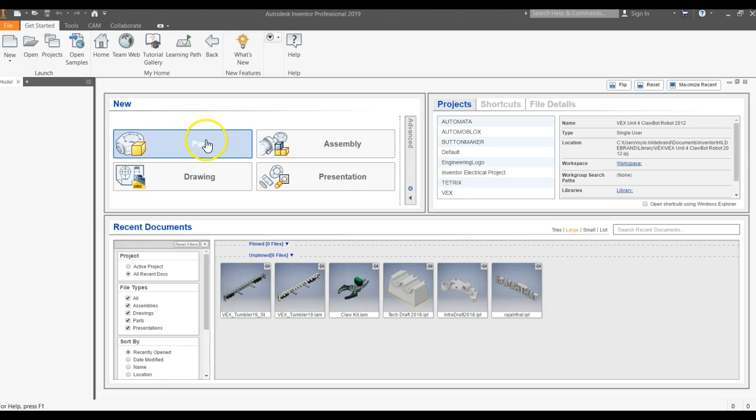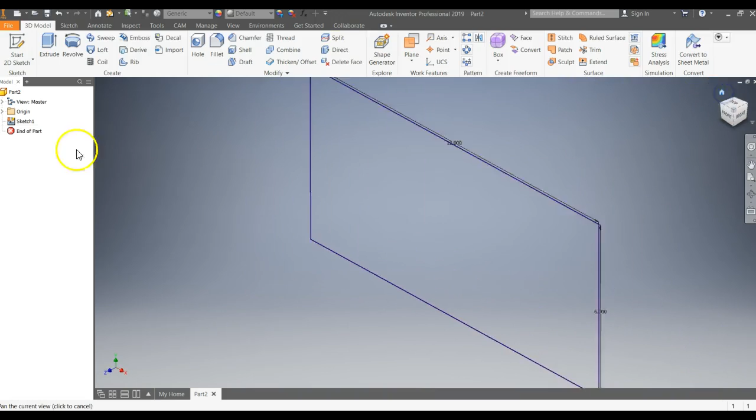So all I'm going to do right now is make a sign. Doesn't have to be any specific size really, but I'm going to make a 12 by 6 rectangle that is just shy of 3/4 of an inch. So I'm going to go rectangle tool and extend it out by 12 inches and 6 inches. So I've got a nice big piece of wood. I'm going to extrude that thing to make it a little shy of 3/4 of an inch, so I'm going to turn that into 0.7.

Great, so that's going to be our finished sign that we're aiming for. But I want to carve something out to make it look cool. So we're going to make a separate place for us to put whatever text we're wanting to cut out as a sign. I'm going to start another 2D sketch on this front face.

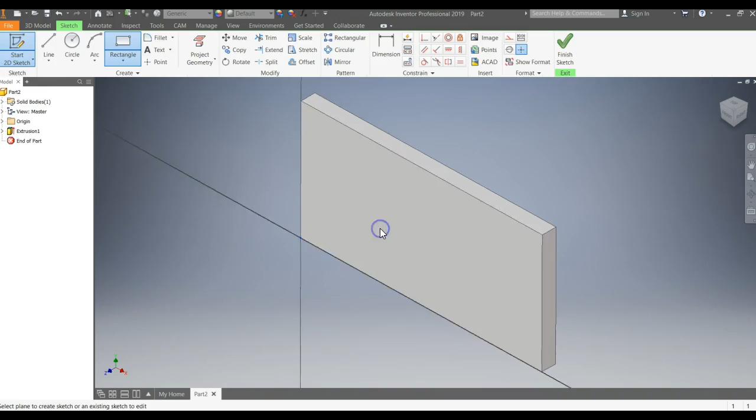I'm going to put another rectangle right there, and let's dimension this thing just to give it some proper symmetry. So if I dimension this, let's see, 3/4 of an inch seems fine. I'm going to create a gap all the way around the outside edge, that's 0.75, 3/4 of an inch.

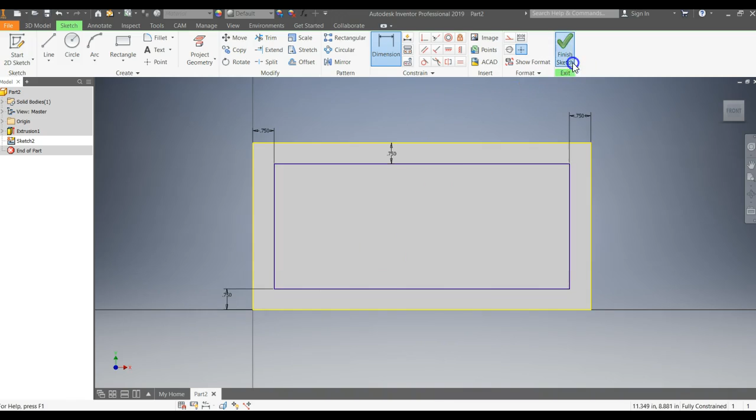All right, that rectangle, we're going to extrude that into the piece of wood. Make sure you select, so you can bring it out just to see what you're doing, but then turn it around. We're going to cut into the piece of wood, but not all the way through. We just want to cut into the piece of wood, maybe 1/4 inch.

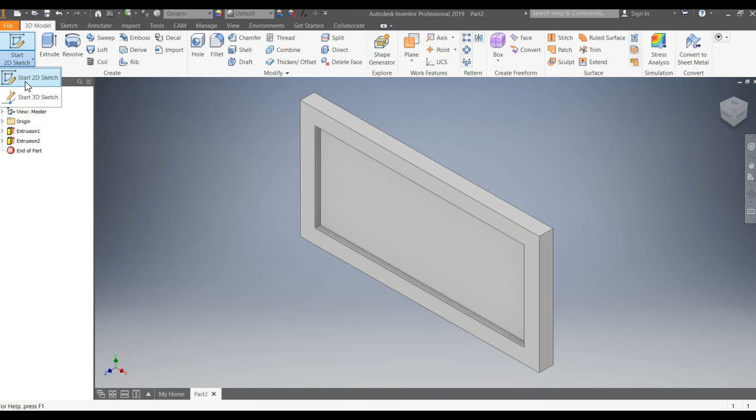So I'm going to be carving that out, but I wanted to carve out something interesting. So let's try the text tool and add a bit of text. I'm going to do one final 2D sketch on that face, where I am going to use the text of the word peace.

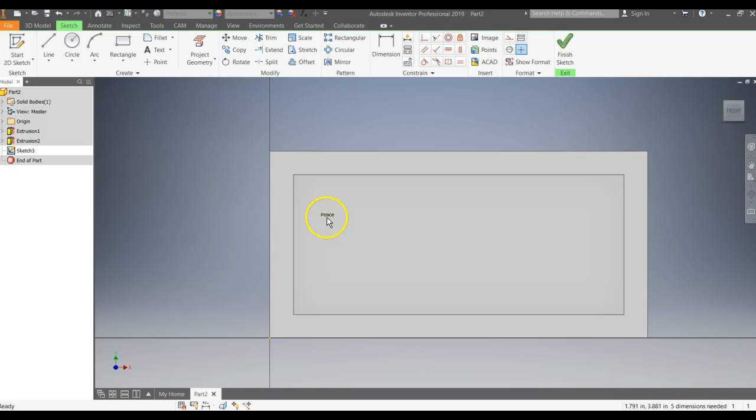World peace. So if I do that, that's pretty lame, that text is way too small. So if I escape out, I should be able to make that text go white if I zoom in over it. So if I can make it go white, I can bring my text back.

Weird thing about the text tool within Inventor is that I have to select that text inside that box in order to modify it. And let's jump to like some sort of custom 2-inch size, and let's see where that takes us. So if I make the text size 2 inches, seems like it actually still has quite a bit of space.

So one more time, let's go all the way to 2. I think 2.5 is going to be too big, so 2.25.

Having some space between letters is actually fantastic because we want a tool to pass in between all of these letters. So something to consider is that when you selected your text, this button on the top corner actually allows you to stretch it out. So if I go to 110 instead of 100, it's going to stretch my letters out a bit and fill up that space and actually produce a bit of a gap between my letters.

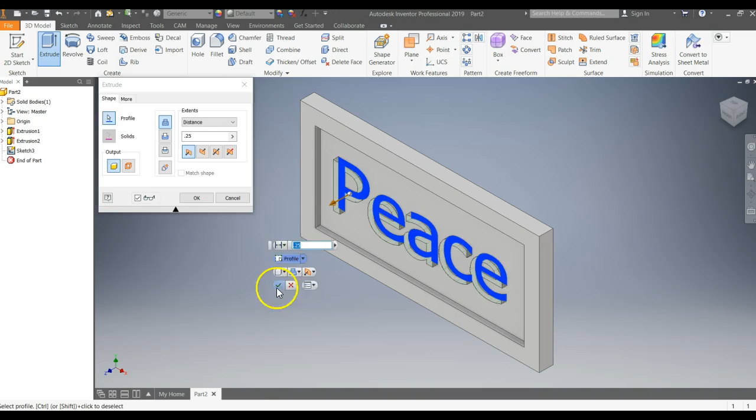So if I finish that sketch, that looks pretty good. I'm not going to dimension that, it doesn't have to be super perfect. I'm going to bring that back out 1/4 of an inch. And then let's see if we can recognize that we have a bit of relief. So if I carved that out, I'd have a sign that said peace on it.

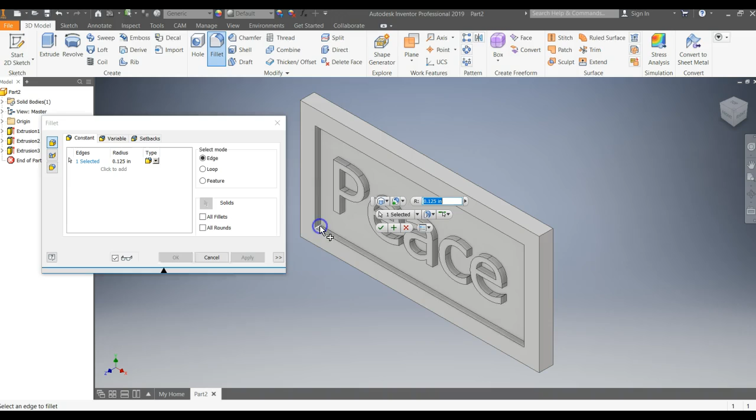The tool we're going to be using, like any CNC tool, is rounded, so these corners are impossible for me to carve and make completely perpendicular. So the one tool I'm going to ask you to try, or it'll do this automatically anyway, so it's kind of nice to build it into your design, is just to take that edge and make it actually rounded, because the tool bit is rounded, it's going to happen anyway. So it gives you a better feel of what you're going to be ending up with.

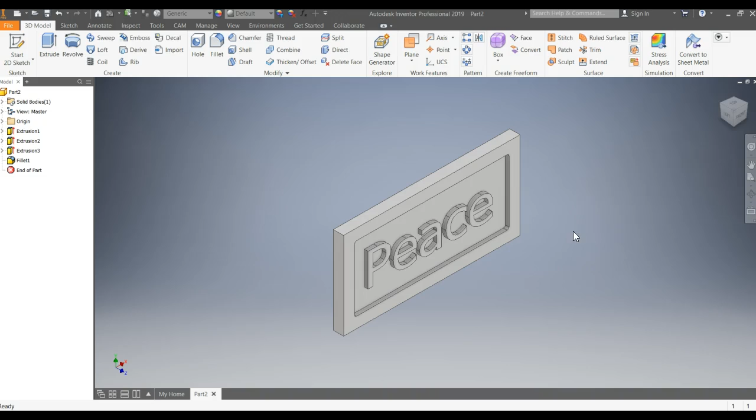So now if I press check mark, I have a sign. That represents what I'm going to try to carve away on the CNC. Next video, we'll start our tool paths.